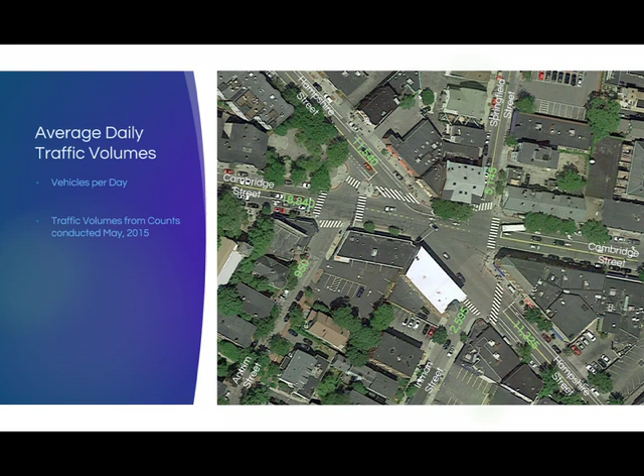So just to start off, I'm going to orient you a little bit. This basic map is going to appear on most of the slides. This is a map of Inman Square. North is up on this diagram. You can see Cambridge Street traveling east-west across the map. You've got Hampshire Street from the upper left to the lower right, on the diagonal. Then you've got Inman Street, Antrim Street, and Springfield Street coming in.

So one of the unusual aspects of Inman Square, as I'm sure anybody who has walked or driven through it knows, is it's a very large intersection. It's got 7 legs. Typically we think of an intersection as 3 or 4 legs, maybe 5 legs for an unusual one. So a 7-leg intersection is very large and presents a lot of fairly unique challenges.

So in terms of the vehicle volumes, we've got about 5,000 cars a day on Springfield Street, about 11,000 cars a day on Hampshire Street, and 18,000 cars a day on Cambridge Street. Antrim Street has 950 cars a day, and Inman Street has about 2,600 cars a day. So it gives you an idea of proportionally how these streets stand and how much traffic they're carrying through the intersection. There's a very large number of users.

We also did include pedestrian and bicycle counts as part of this project, especially during the morning and afternoon peak hours. Close to or as much as half of the traffic on Hampshire Street is actually made up of bicycles. So there's a very large volume of cyclists traveling through here, and that's definitely something that's going to play heavily into any changes and recommendations that are made here.

So we did also collect crash data. The data were collected from 2008 to 2012. There were a total of 69 crashes in the intersection within that 5-year window, and that does exceed the statewide average crash rate for a signalized intersection. 15 of those crashes involve bicycles, 5 of those crashes involve pedestrians.

So just talking about some of the challenges from the pedestrian routing perspective. So we've got some very long crosswalks through the square here, several places where it might take you 15 or 20 seconds to cross the street, which is something we're always looking at with pedestrians in a crosswalk. We want to minimize the length of that crosswalk just to reduce your exposure to a potential conflict with the vehicle. We've got a couple of crosswalks that do not provide signal control,

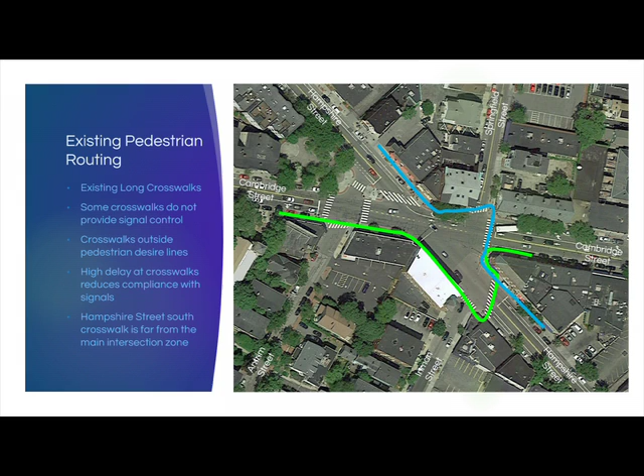and then we've got the existing issues with the pedestrian routing. So you can see this green arrow. If you're walking along Cambridge Street on the south side, if you follow the alignment of the crosswalks, you have to walk pretty far out of your way to continue down that street. A pedestrian is going to naturally want to just continue in a straight line and cut off that little U-turn there. And in reality, some pedestrians do choose to do that, which is a safety concern.

The other thing that we see is that some of these crosswalks have a very high delay when you're waiting for the walk signal, and that again reduces the compliance. If you have to wait over a minute for the walk signal, you're likely to say, I see a gap in traffic, I'm going to try to run for it. So any changes we make, we'll be looking to reduce that delay as much as possible, so that people are encouraged to wait for the walk signal.

So the other big challenge for this intersection is the fire station. So we've got 5 garage bays in that fire station exiting directly out into the intersection. So any changes to the signal, we have to take that into account. We have to make sure the fire station still has access in and out. The way the signal operates today, the fire station activates what we call a preemption phase. That allows them to safely exit the fire station with all traffic stopped.

So if you've ever come up to the intersection when a fire engine was leaving, you'll see the signal will go all red for 45 to 50 seconds. So it's a long time for them to be able to pull out of there safely and maneuver to whichever street they need to go to respond to an emergency call. So that's again something we'll be looking to incorporate in any future designs.

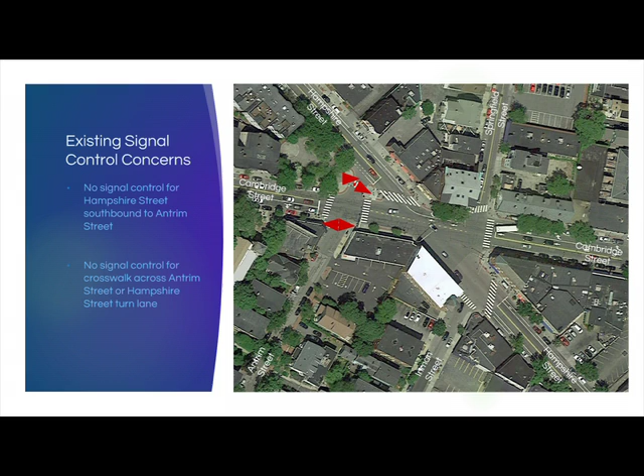So we've got some concerns with the signal controls as well. So if you're coming down Hampshire Street, coming from Somerville, and you want to make that kind of right/through movement to Antrim Street, there's no actual signal control provided for that movement, and it's a little bit of a gray area as to when you're supposed to make that movement.

So if you go at the same time cars are coming through from Springfield Street, you generally have that opportunity to go. But if the cars on Cambridge Street have the through movement, there's nothing really telling you to wait for the next phase. And then we also have those two crosswalks there, which are also not controlled by the signal.

So the other thing is just the huge geometry issues that are created by what we traffic engineers call skew. So in an ideal world, we're always looking for intersections to be 90 degrees. That minimizes the radius of the curves, it minimizes the size of the intersection, and it creates expected geometry as you're in a car or a bike or a pedestrian. You come up, you know where the cars are coming from, you know where they're going to. And that also minimizes the size of the intersection.

The more the streets have an angle from each other, the more the intersection starts getting bigger just to accommodate the movements that happen there. So in the case of Inman Square, we've got about 270 feet, which is almost the size of a football field, between the stop bars on Cambridge Street and between the stop bars on Hampshire Street. So that creates some operational and safety concerns for all users.

There's that concern as you're going through the middle of the intersection, especially on a bicycle. 270 feet is a very long distance to go when you're just kind of out there. There's traffic moving around, everybody's making different turning movements. The same thing for a vehicle, especially if you're making a turn, you're out there in the middle of the intersection. It's not always clear where should I stop and wait, how do I tell what everybody else is doing. That large, expansive pavement creates a little bit of confusion for all the users.

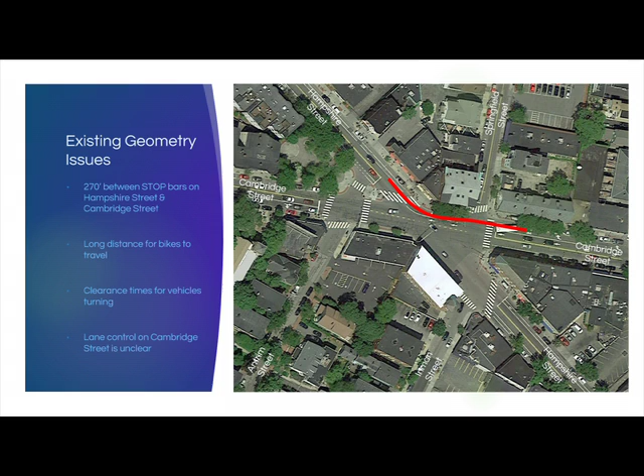The other issue is the clearance time. So if you're coming, say, eastbound on Cambridge Street, and the light turns yellow right as you go through, the amount of time it takes you, especially if you were going to make that left turn on Springfield Street, which is probably the longest distance you could be in the intersection, by the time you get all the way up to Springfield Street and make that left turn, Springfield Street might already have the green light, especially if you had to wait a second for through vehicles to clear.

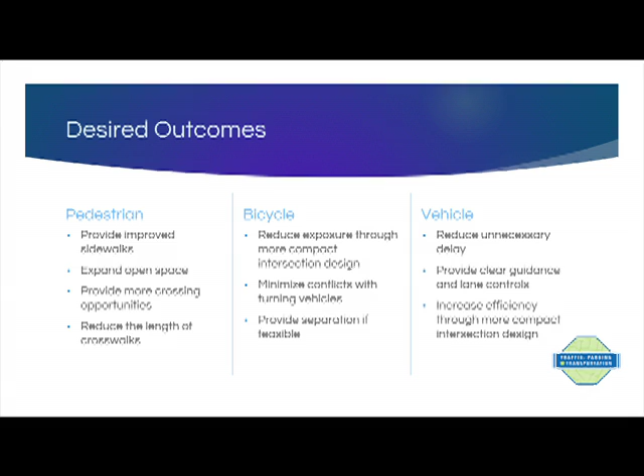So it's just a little bit of a confusing issue that the vehicles on Springfield Street see a green light, but there's still traffic moving through the intersection. So these are all challenges that are really exacerbated by that very large size.

And lastly, we've heard from some people that the lane control on Cambridge Street is a little unclear. So as you come up, the left lane has the straight arrow, the right lane has the right turn arrow, and whether that right turn arrow means you have to turn on Springfield Street or that means Springfield Street or Hampshire Street, I think every driver will give you a different opinion on that. So that's another issue that's kind of created by that large size.

So I'd like to talk a little bit about desired outcomes. So we're looking at a couple different options for what we can do with the intersection to rectify as many of these issues as possible. So we want to make sure that we're improving the intersection for all users. So for pedestrians, wherever possible, we'd like to improve sidewalks. We'd like to expand open space if possible, provide more crossing opportunities, and reduce the length of those crossing opportunities.

For bicycles, we want to reduce exposure. We shrink the size of the intersection, we reduce the amount of time you're out there and have the potential to have a conflict with a turning vehicle. And if possible, we'd love to provide options for separated facilities as well. For vehicles, we'd like to reduce unnecessary delays. A very large intersection, again, creates that extra time you have to wait for vehicles to clear.

With smaller intersections, the vehicles clear the intersection faster, and we're able to cycle to the next phase. And through that method, we're kind of almost creating time. So we've only got so many seconds in the hour to process vehicles through there. The fewer seconds we have to spend leaving all the signals red while people clear out, the more efficient we're able to make the intersection operate.

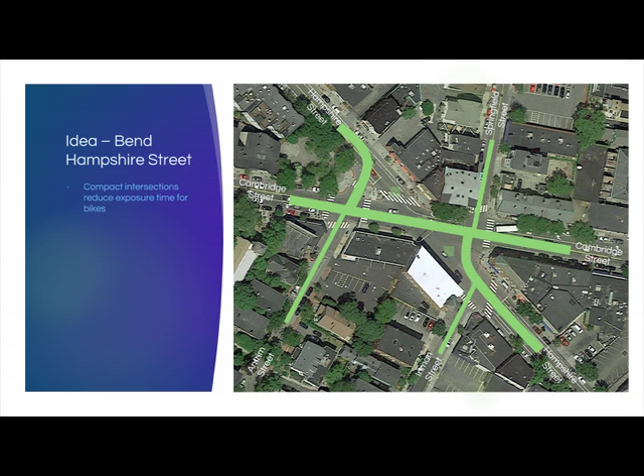And again, as I mentioned, the signal control would be designed for continuous movement. So as you're coming down Hampshire Street, you're going to have to make a left onto Cambridge and then bend a right back onto Hampshire. But that would all be controlled as a single movement, so you're not going to come down, get a green at the first one, and then a red at the second one, and have the traffic congestion come with that. The same would be true for Cambridge Street moving through the intersection.

The one issue we've identified with this concept that will require a little more review is the bicycle movements. So the bicycles coming up Hampshire Street outbound or coming down inbound will have to make their first entrance in the intersection as a left turn. So we need to really think about how that movement's going to work and how that's going to interact with vehicles that are making similar movements.

Our traffic information does show the vast majority of cars on both Cambridge Street and Hampshire Street are going straight through the intersection with relatively few turns, and we do notice that some of those left turn movements are illegal as well, so that kind of helps some of these situations.

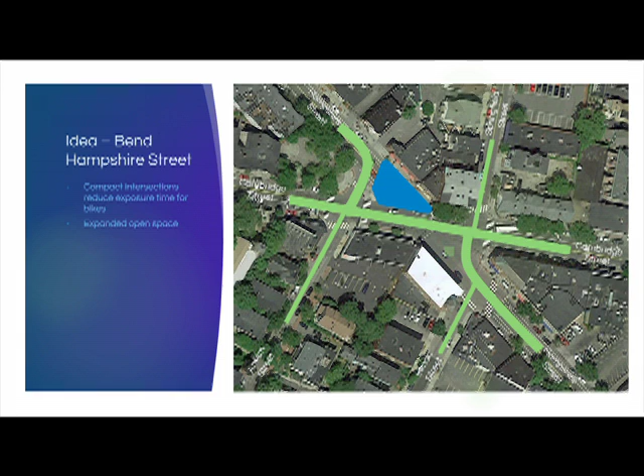So idea number two is to take that first idea and just kind of turn it on its head. We first looked at bending Hampshire Street around to Cambridge. So then we looked at, well, what if we bend Cambridge around to Hampshire Street? So again, similar concept, we bend the two street approaches around, so we're creating two separate intersections.

We've got a little more opportunity for open space in this concept because in the first concept, some open space was created in front of the fire station, but that would all have to be designed so that the fire vehicles are able to drive right over that. So this would create the two different open space areas you see on the map here. We again have two traffic signals. They operate very similarly to the previous concept.

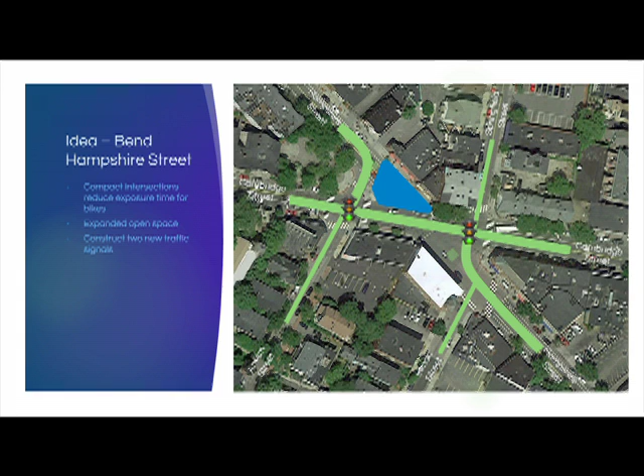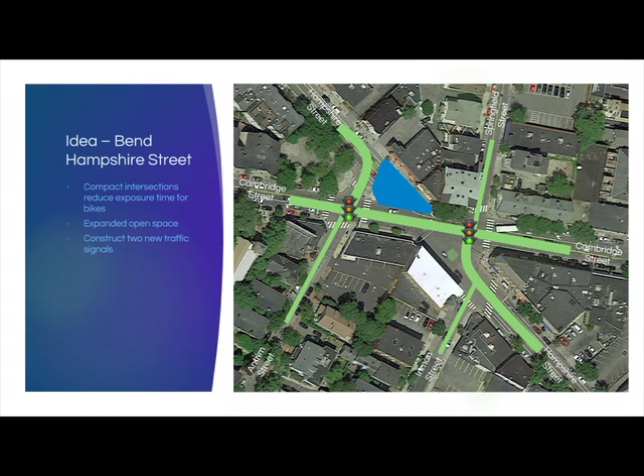Can I ask, what happens to Springfield Street here? So I'll get to that in a minute. That will require some operational changes to Springfield Street that we're still going to be looking at and considering various different options for.

And then again, you've got the multiple new crosswalk locations and traffic flow would work in a similar nature. Traffic on Cambridge Street would have to make a right into the intersection and then a left out of the intersection to continue along that alignment. But that would operate all as a single phase. So once you get a green at the first signal, you receive a green at the second signal to continue through there. So that will require operational changes on Springfield Street.

So we're going to have to look at a couple different options to see how vehicles get in and out of Springfield Street, or it may be necessary to convert it to one way into the intersection or one way out of the intersection. That's something we're really looking at. The other approaches are already one way away from the intersection, but any changes there must consider access for the businesses, access for the residents. We also have to coordinate with the city of Somerville because it's only about maybe 200 feet off the road there to the city line.

So next steps, we're here tonight for discussion with the community. We're looking to hear from all of you. We're looking to hear from people who aren't here tonight. So if you go home and you're talking to your neighbors or business owners that weren't able to make it, this presentation will be available online. We're looking for comments. Give us a call, send us an email.

Tell us what you think. If there's issues we missed, if you have ideas that we haven't mentioned tonight that you'd like us to look at, we can definitely consider those. We want to hear from everybody and figure out what works best for the neighborhood, what works best for the business owners, the residents.